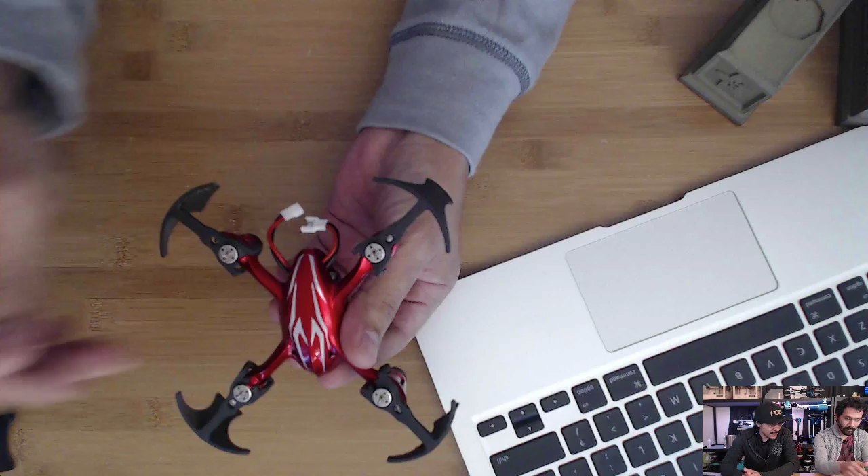We wanted to incorporate some landing gears, which it turns out we didn't really need. We wanted to launch this in our backyard. We have tall grass, so it turns out we can just toss these in the air. So I'm going to have to update that.

What we did figure out was we had a chance to try out the carbon fiber PLA filament from Protopasta. Right away I printed these out and wanted to see the weight difference between this and a regular PLA part. It turns out that we're saving 2 grams of weight with this. As you guys know who fly drones, what is the weight for? The weight definitely is a big factor. One gram takes about half a minute away from your battery time, so you're saving some minutes here.

You could definitely see the difference when you put these on a scale. You can see how much less these guys weigh. All 4 of these put together weigh 6 grams, and when you compare it to the carbon fiber, it only weighs 4 grams. It's awesome, so you're saving 2 grams there. When you update your design, you'll probably even save more on weight. That's really, really cool.

I really like the design of these props. I haven't seen something like this where it kind of looks like wings or something, like it's ready for battle. It's really cool, I like the design.

This is going to be a future project. You're going to make a nice learning guide and probably release the design file so you guys can modify it and take a look at it.

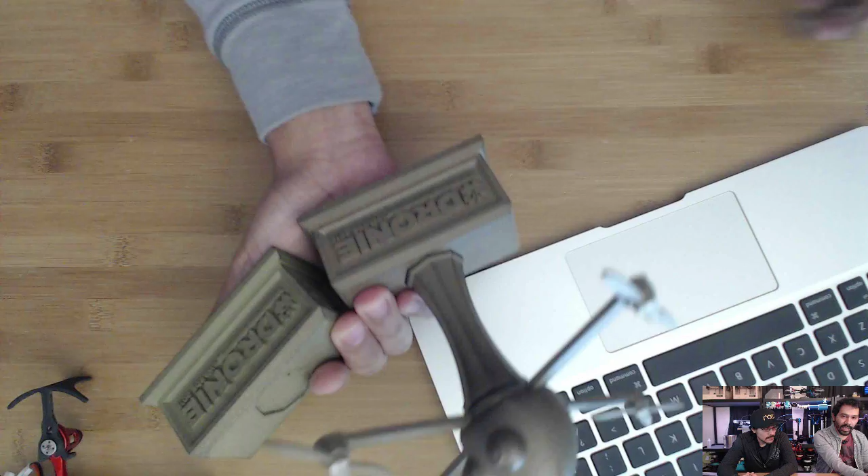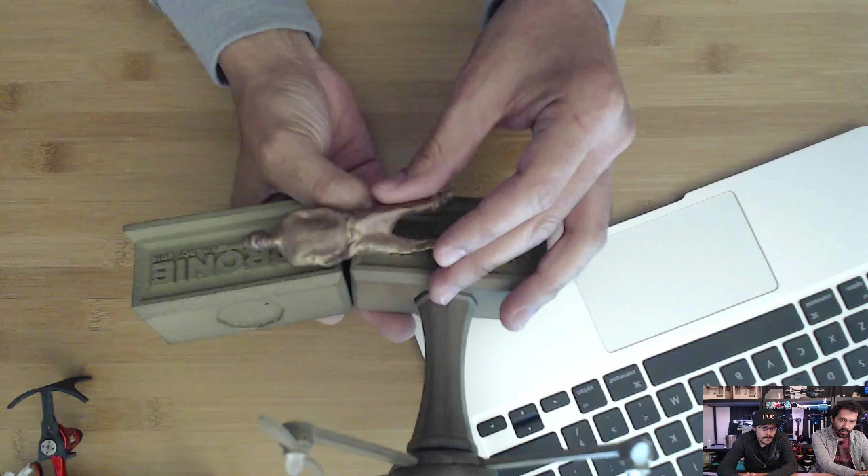You're able to bend it really easy. In terms of the shade of color, you get more of a greenish type tint compared to the bronze, which gives more of a darker, contrasting color. With copper, you get more of a yellowy type shiny look. I like the red in there too. You get like some sort of rose gold in there.

So the copper and bronze are definitely heavy, brass is way lighter than the other two. If you want it to look like metal, but maybe for a drone flyer or something, check out this stuff. If weight is an issue, there you go.

Just wanted to show how soft the brass material actually is. This is one of the prop guards that we were trying to remove from the bed. As you can see, it is pretty flexible there in terms of how soft the material is. So it's a little bit more fragile.

Definitely wouldn't be able to use these, I don't think, in a cosplay prop like the copper that we did for this week's syringe. Still experimenting on this guy, we'll let you guys know any updates on use cases. So far it seems to be good for things like statues, jewelry. Soft material, more of a greenish tint.

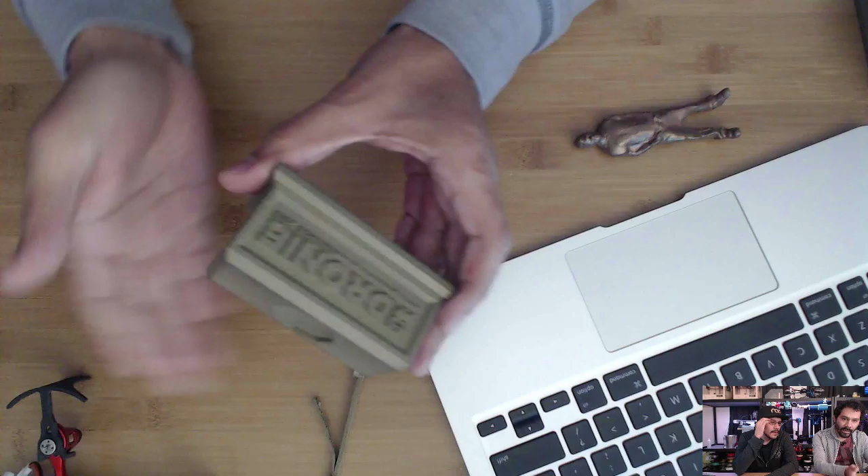Now let's talk about our rotary tumbler, maybe the medium, and also we did a polishing video not too long ago about using the rotary tumbler in different mediums. Do you want to tell us real quick what you recommend as a medium, what type of material?

We're using the same tumbler. The medium that we're using for the brass is, of course, brass screws. So brass on brass seems to work pretty well, and that worked really good with the copper as well, too. If you check back that video, that's what we used to get the polish for this copper.

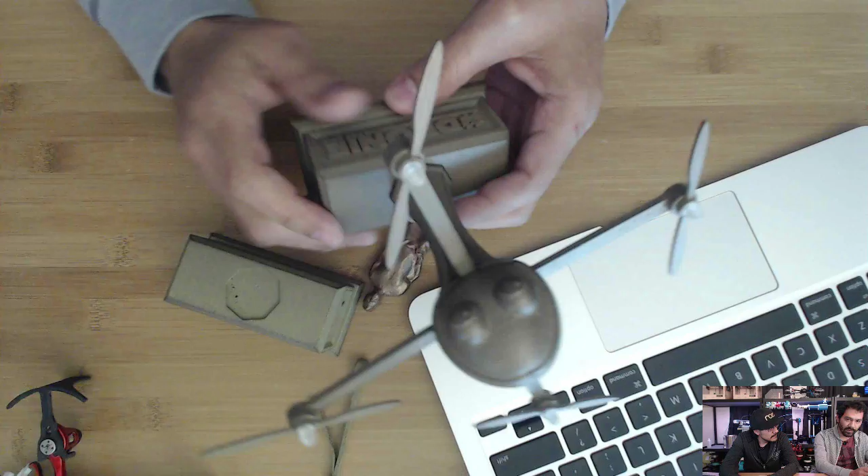For bronze, since we want it to have the darker feel, we're actually using stainless steel screws for this. That's what brings out more of the darker tones. We tried using brass on this, and it just made it look exactly like copper. So you definitely want to use the right steel medium to keep the finishing.

These all used the same polishing techniques, but all different mediums, and that's one thing you want to look out for when you're polishing this stuff. Each part is about 4 hours in the tumbler, which is actually a lot better than hand polishing it, as you'll see soon in the video.

Okay, more prototypes here. We're working on a very little tiny miniature. That's right, folks, this is a sneak peek. This is a new Pi TFT screen for the Raspberry Pi.

This is designed by Limor in K-Town. It's actually so new, it's still purple, still from Osh Park. And the real cool thing about this one, do you want to show that off, Pedro? I don't want to get in your space there. This one's a really cool one.

It has 5 buttons. It's a 2.4-inch TFT for the Pi. And what we're going to do with this project, we're going to make an update to our Game Girl project. This is going to be a pocket Game Girl using the Raspberry Pi Zero, plus, with the smaller screen.

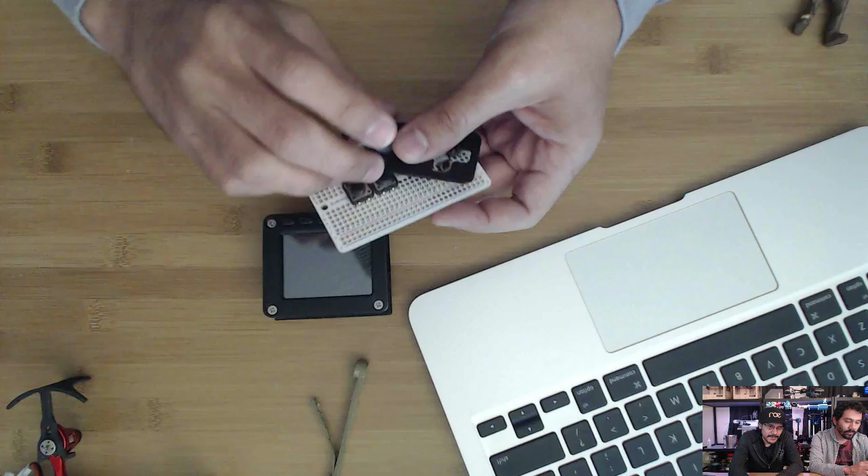Very, very cool project. Remember, we put together a Bluetooth gamepad not too long ago. So we're going to do sort of the same thing using a Permaproto, but of course we're going to have to saw it into a smaller piece there so we can fit everything in. But it'll be hand size, it'll fit in your hand.

Super cute, very adorable. Can't wait to finish this one. It's in the works now, folks.

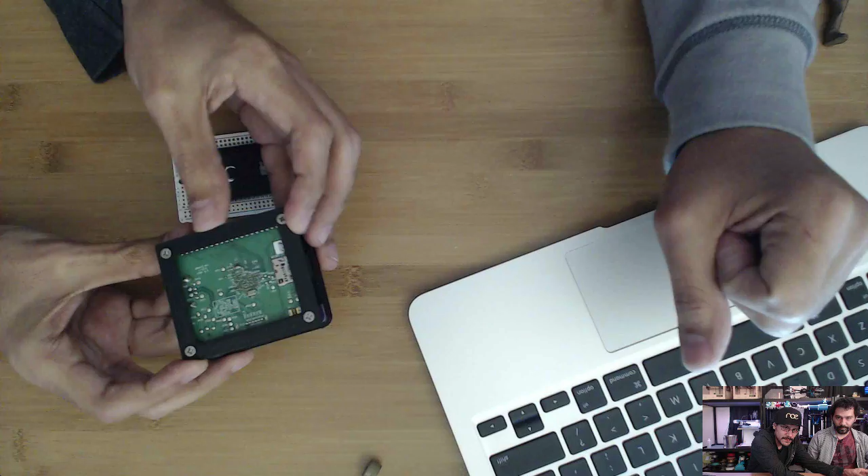So just wanted to show you guys the little mounting area here. This is just four standoffs that are mounted like that. And then we also have the little test bracket here. So if you saw the video last week on standoffs, same approach. We just kind of cut this out. I didn't need to print all that because I'm just testing this. Very cool little project.

Looking forward to it. Again, that's a new product that's coming out in the coming weeks. It's a 2.4-inch Pi TFT. So that is it, that's the prototype stuff.

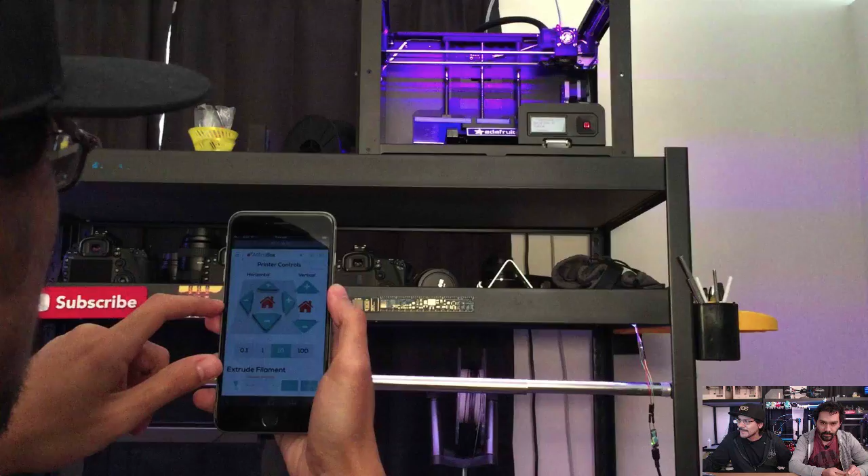Daniel, the CTO from AstroPrint, emailed me and said they've got a beta they want us to check out for the MakerBots and Sailfish. So now AstroPrint's going to work natively with machines that use Sailfish firmware and native MakerBot Replicators. This is a big deal for us, especially since we still use our Replicator 2 quite heavily. It's a workhorse machine, works really well, very reliable, and now we can control it with our phone.

When the MakerBot 5th gens came out, we were a little jealous because you can access it through your phone, get it on the Wi-Fi, get a camera, do all that. Now you can do it with DIY. You can get yourself a Raspberry Pi, plug it in, and you're up and running on your Wi-Fi network.

So here I am heating it up, testing it out, kicking off a print. It's able to generate X3G files, and then we can wirelessly send these over to the printer without having to tether. We're using a Mac Mini right next to the Replicator because our SD card broke. That's right, so it's another reason to upgrade to an AstroBox or an OctoPrint.

Very, very cool, I love it. Definitely a worthwhile upgrade for this. Yeah, it's coming soon, guys. It's still in beta, there's very little bugs, almost no bugs. So that's really, really cool. We'll keep testing it and let you guys know when it's ready.

Next up, you just saw it, Mr. James Bruton peeping in, saying what's up. This is a very cool project. Every week James has got a new update to his massive project. This week, HulkBuster, this is really cool. As more content comes out from the Avengers trailer and movie, James is revising his thing bit by bit.

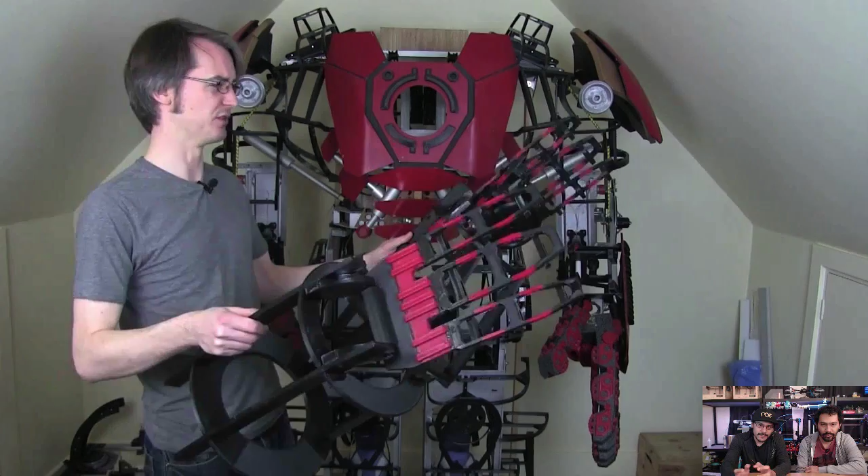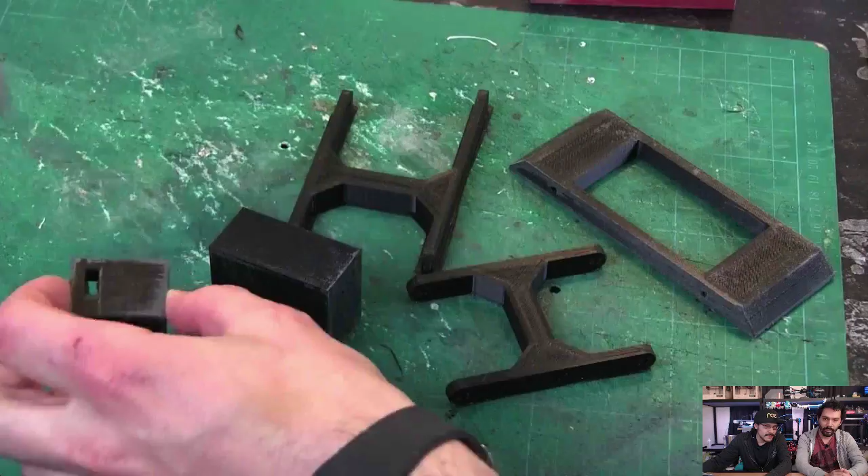This time, massive arms. This thing is a multi-part print using NinjaFlex for the flexible joints in the fingers, and then rigid ABS material that's acetoned, chemically bonded together to make these massive parts. Very, very cool. In this update, he goes through his CAD, walks us through some of the mechanisms for the arm, prints it out, and now he's starting to look at a bunch of options for mounting.

Servos, electronics. This is really cool. Here it is with the arms all built in there. Very, very nice looking. He's even using nylon filament as the string cords to make the hand open and close. Very, very cool approach there.

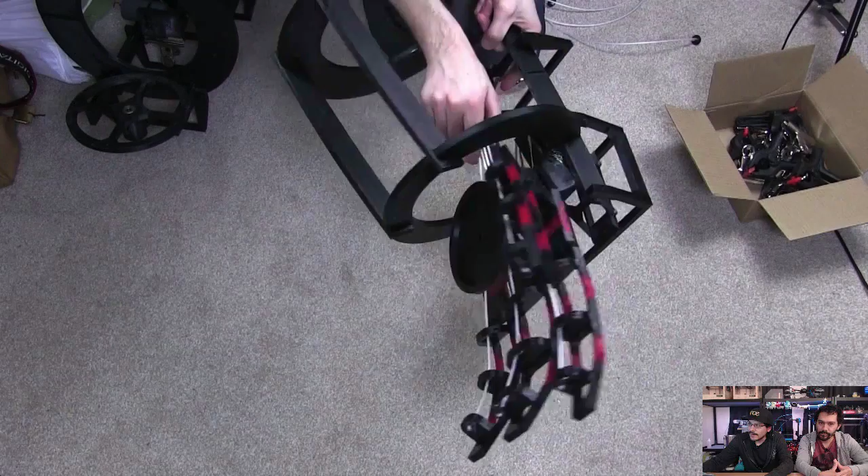Here he is testing that mechanism out. So when you tug on those wires, you can open up your hand like that for shooting out some laser beams, and then you can close the fist like that so you can shoot out some rockets. Very, very cool.

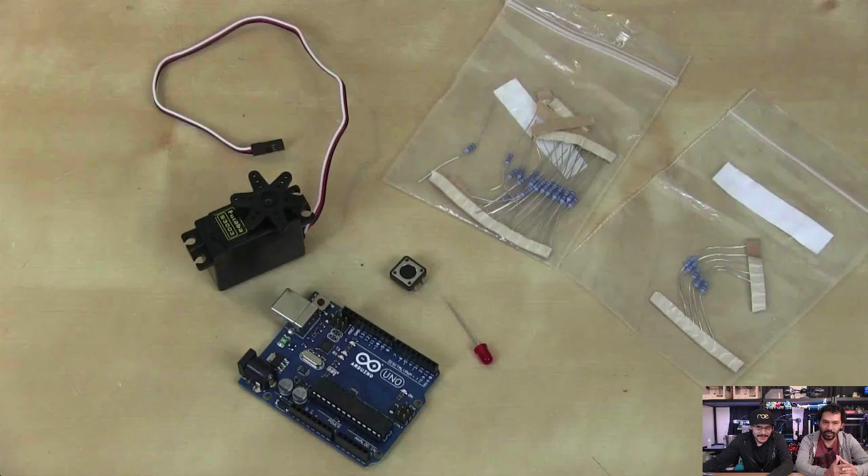Yeah, there's a lot of components that he's working on for this. And what's really cool is now he's jumping into Arduino and showing off how he's going to be coding a lot of the logic for the servos and the LEDs coming out.

So here he is drawing some schematics of how everything works. Really love his explanation of how he's actually coding this as well. He jumps into Arduino IDE and he's looking at some of the definition declarations that he's added to his file. He's going to be releasing these for free, and you can check out a very nice explanation of how everything's being triggered, how everything works.

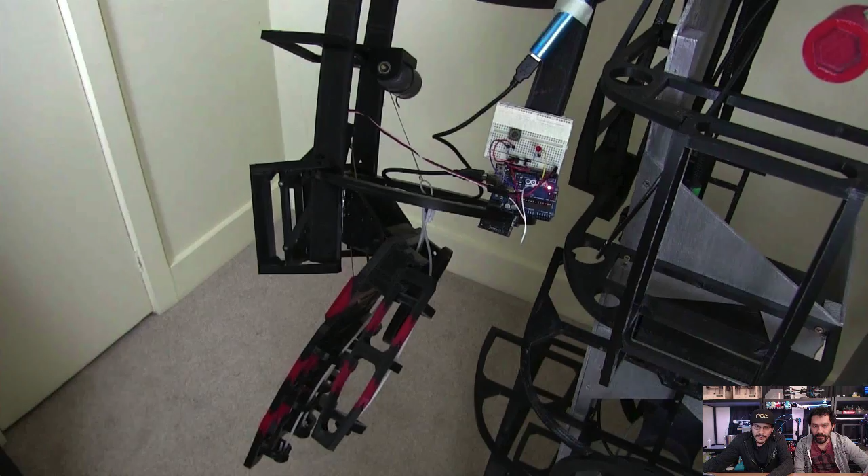And then on the finale, he gets a nice little prototype mocked up here. So basically, hit a switch, it activates a servo, and then fires off his LED. This is a really cool circuit because you can use this for all sorts of different projects. So you'll be seeing more of this from James in the coming weeks.

Very, very cool, gotta watch out for it, and hopefully next week we'll see some more stuff on the Unibeam, that part that you put together. A couple months ago we collaborated and put together a Unibeam for the center chest, which is a very, very cool project in collaboration with Phil B.

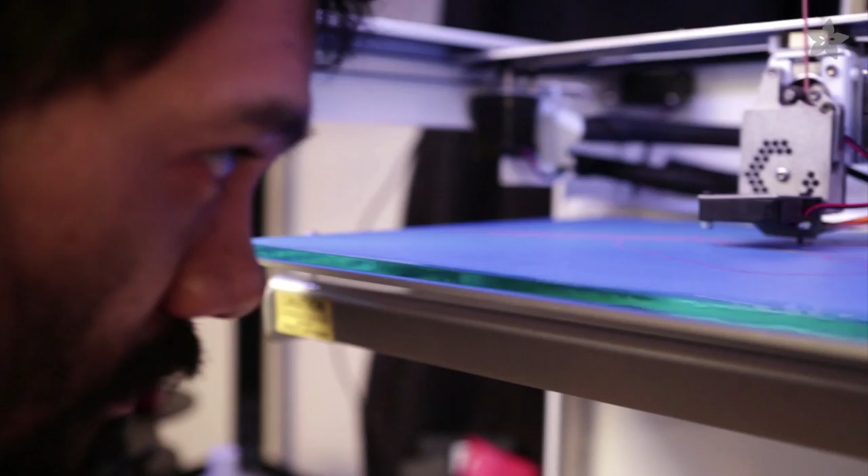To 3D print the parts, we're using the Type A Machines Series 1. We're using copper filament to give the parts more weight, and it's also going to give it a really nice grungy steampunk look when we polish these parts. You can check out the review on copper fill in this video here for more information on polishing techniques. Each part takes about 2.5 hours to print.

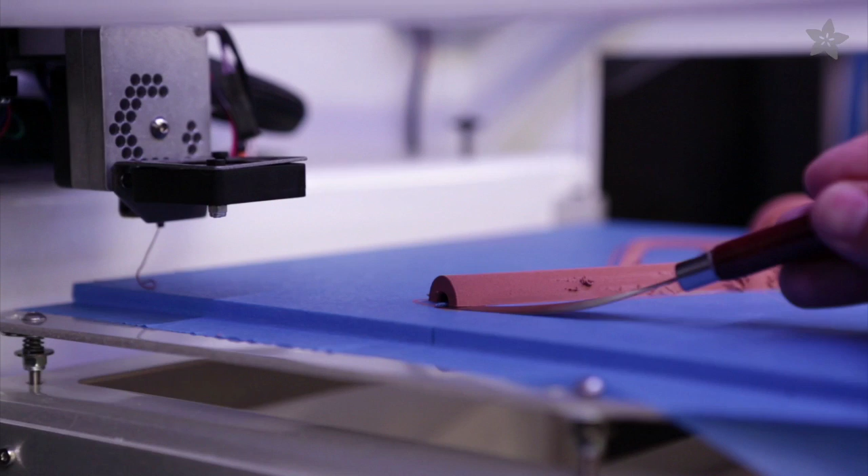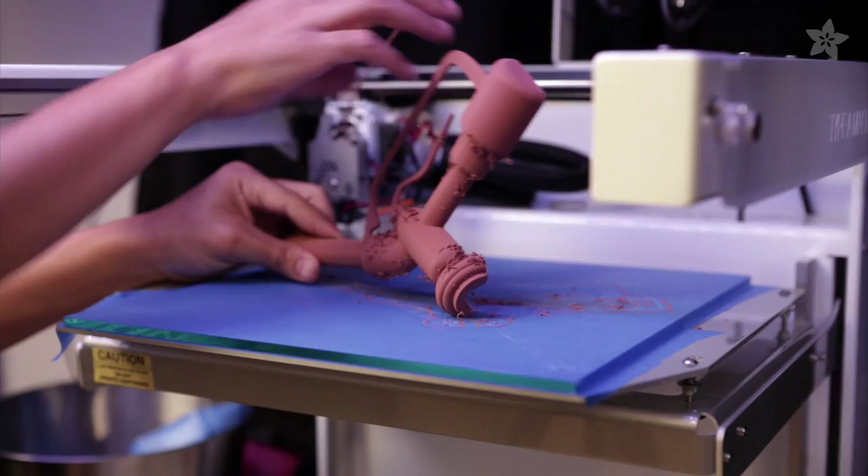We found that the best way to remove copper filled parts without damaging the blue tape is to use a palette knife and a spatula. Most parts printed in copper fill are going to need some cleanup, so we trim off the stringy bits using our fingers, then move on to the Hakko snips and the palette knife.

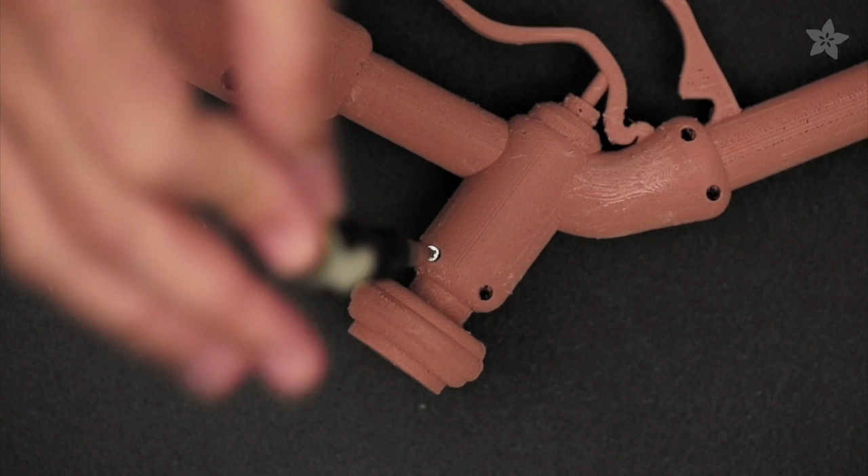The standoffs are printed with a tight tolerance, so we need to tap the screws using a couple of tweezers. We designed the standoffs to fit number 2-56 screws, so you'll want to fasten the screws into the standoffs to create the threading.

Now let's take a look at some of the polishing techniques. We tried out the Dremel polishing kit and found these 3 bits work the best: the white detail abrasive brush, the 280, and the 320 grit abrasive buff.

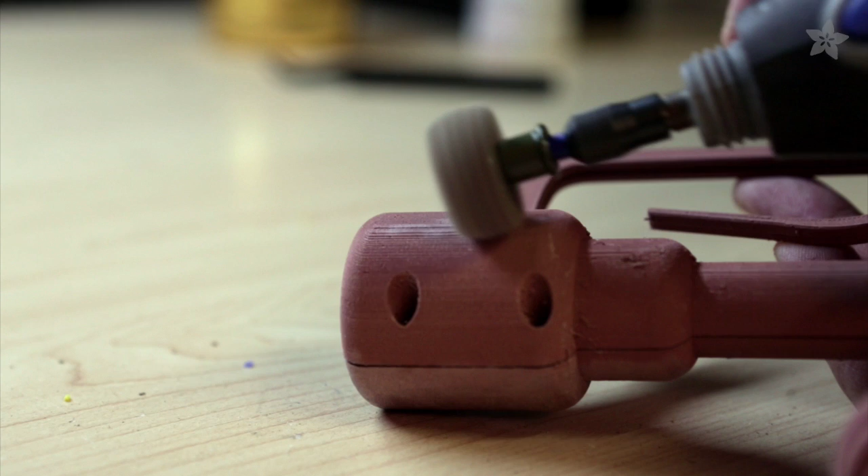Polishing takes a lot of time, so you're going to need at least an hour for each side to get that shiny finish. You'll want to focus on one section at a time, try to blend the layers together, and go back over sections to even out the surface.

You can then switch to the white abrasive brush for contours and hard to reach areas. Use the slowest speed to polish the surface without damaging the base layer.

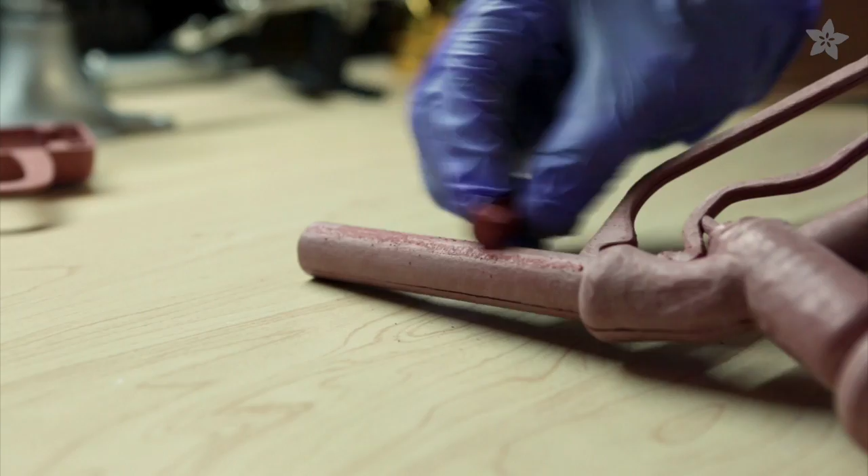Next up, we'll apply some polishing compound to the surface using gloves, and rub it into the holes to fill in the surface. The 320 grit abrasive buff helps smooth out the finish and adds contrasting tones to the overall look of the parts. Comparing the surfaces of these parts, you can really see how well the polished part came out.

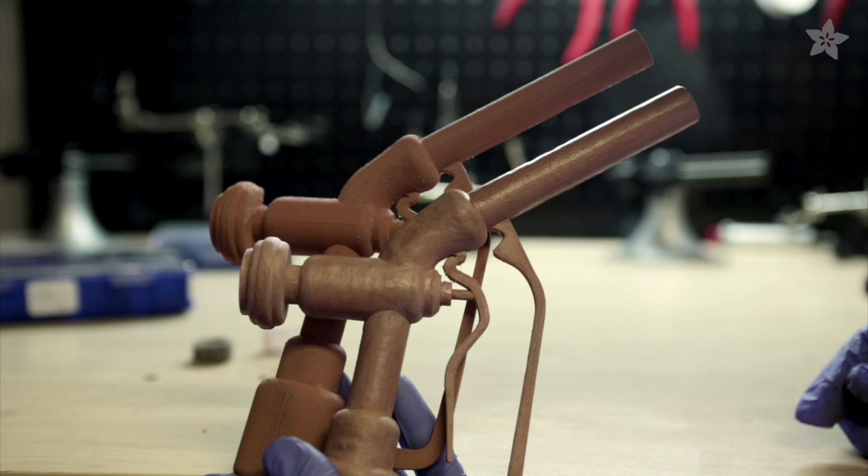It's definitely worth the time finishing your copper-filled prints, and it's a great alternative to the rotary tumbler.

To make the circuit, we'll start off by measuring 3 wires. We're going to be using 30 gauge silicone-coated stranded wires for this. We're also going to use copper foil tape to connect the rechargeable coin cell battery. We'll cut 2 pieces and add a blob of solder so we can connect to the silicone-coated wires.

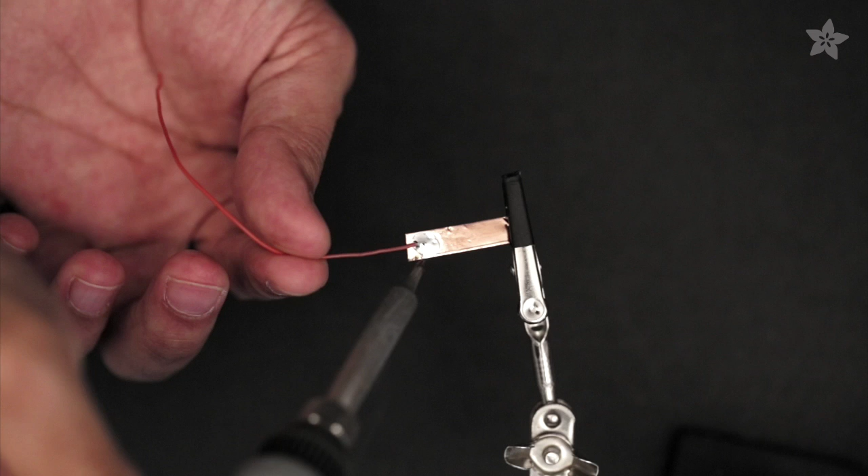The 10mm LED is connected to a 6mm tactile button. We're going to need to tin and connect it to the rest of the circuit. You can read the full guide on the Adafruit Learning System.

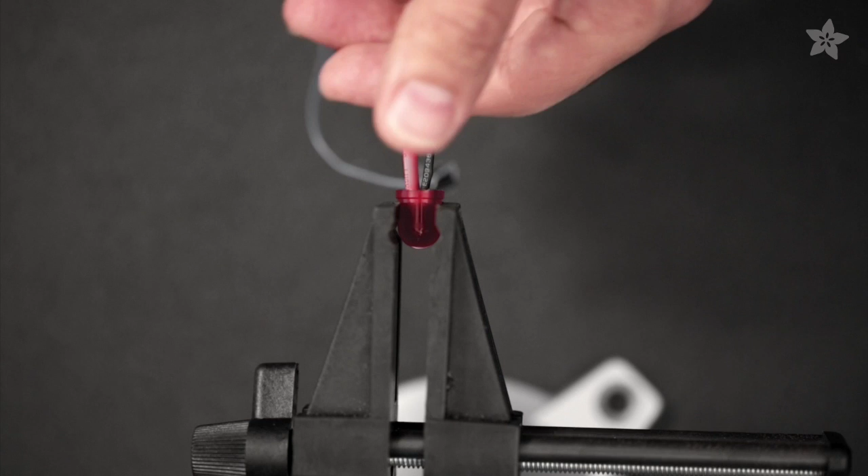Next up, we'll solder the positive and negative connections on the LED and seal it with heat shrink tubing. The copper tape has an adhesive back, so we need to peel back a small portion of it to stick it to the positive and negative sides of the coin cell battery. Leave some of the backing on so the copper tape doesn't touch the side of the battery.

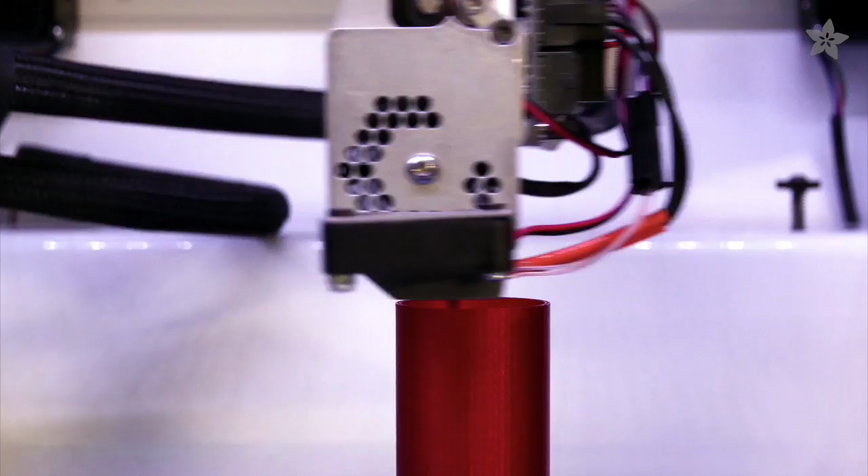The bottle was printed in translucent red PLA, which diffuses the LED really nicely. It was also printed without any supports at 200 microns.

We found if you orient the needle on the bed diagonally, we can print it as large as possible, which turns out to be 434mm long. We printed it in 2 halves and just glued them together using E6000.

Before securing it shut, we'll check to make sure the tactile buttons are mounted in place and test the alignment of the actuator to see if it lights up. The rubber Ninja Flex topper grips nicely onto the bottle and diffuses the LED when printed in transparent Ninja Flex.

And there you have it, little sister Syringe. Definitely one of the coolest 3D printed props that uses multiple materials and of course some simple electronics. Polishing techniques will definitely come in handy in future copper-filled projects.

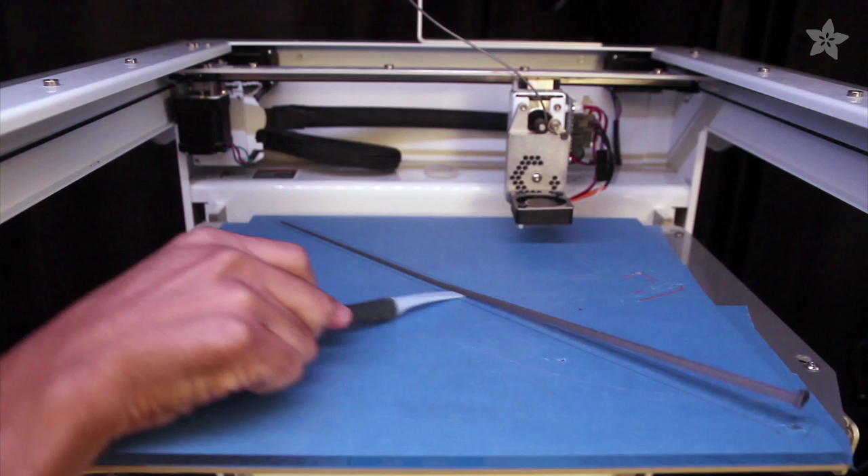So let's take a look at what we learned. Recessed standoffs increase in tolerance with Z depth. Diagonally orienting thin parts will increase the bed volume by 100mm. We also learned about Dremel polishing tips and polishing compounds.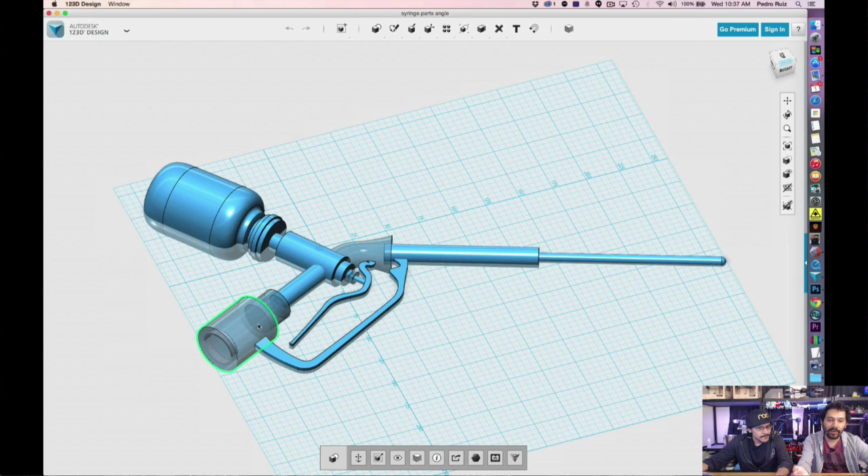So after that, we went ahead and grabbed some of our widgets that we've worked on before, specifically the rechargeable coin cell battery, which you can find on our 123D gallery page. And all this is just the little cylinder there that's completely fitted, so we can just snap on and have a nice tolerance of holding the coin cell.

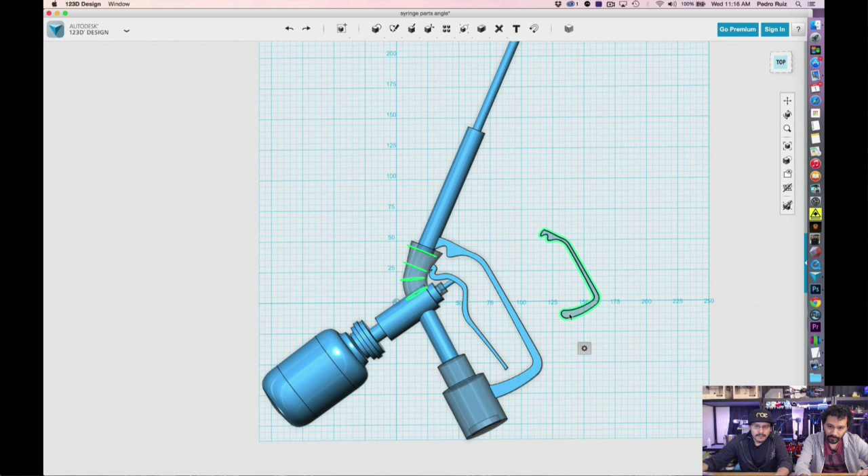We also grabbed the tactile button that we used as the momentary push button in there. And for the handle, I actually imported the vector file because I wanted to be able to apply fillets and smooth it out and change the trigger guard according to my hand.

So the quick tip here is that you don't want to scale your SVGs because the SVG parser that's inside of 123D can get a little wonky. So you want to extrude your SVG file and then scale up the model that you extrude out of that, and you should be able to scale it with no problems there.

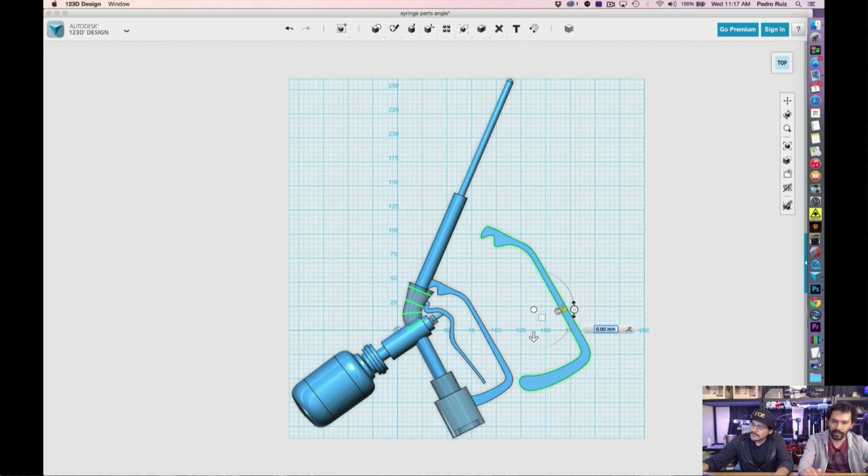After that, I was able to go in there and start to shell out both bodies. And here you can just take a look at some of the way that I created the standoffs. For more on that, you can check out last week's video that explains how Noe creates a lot of his standoffs.

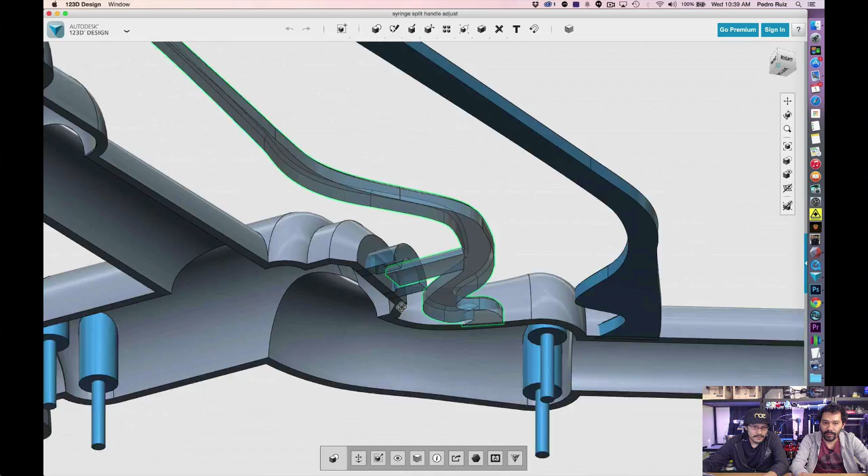So the tip here is not to merge anything that doesn't need to be hollowed out first. 123D can freak out a little bit if it tries to hollow out areas that are too small, so the trigger and the trigger guard don't need to be hollowed out. So what you want to do is keep those separate until you hollow out all of the geometry that you're going to need to before you merge all those together.

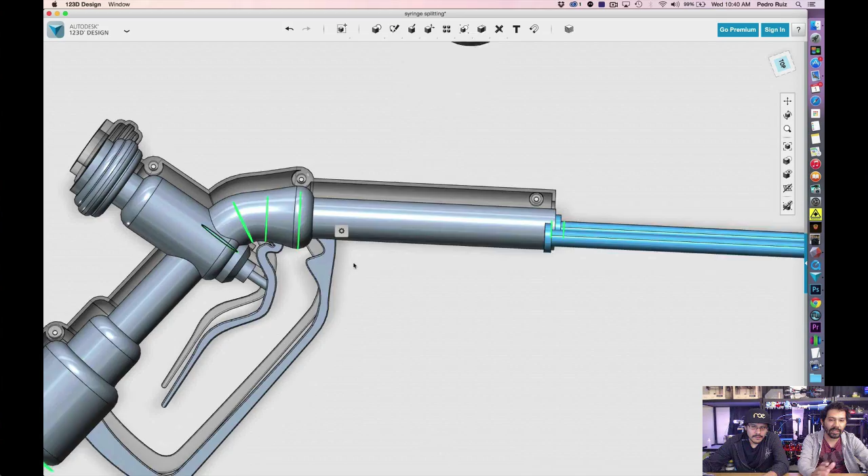Okay, next, we just forgot to mention the way that we created the sort of curved geometry there. It's just a bunch of ellipses that we select and then loft all together.

Okay, so the second tip that we ran into was in the standoff, the radius for it. It actually increases as the curvature of the cylinder goes up, so you definitely want to look out for that. I think it's like a 0.4 to 0.8 difference that you want to increase to make the screws fit inside of the standoffs.

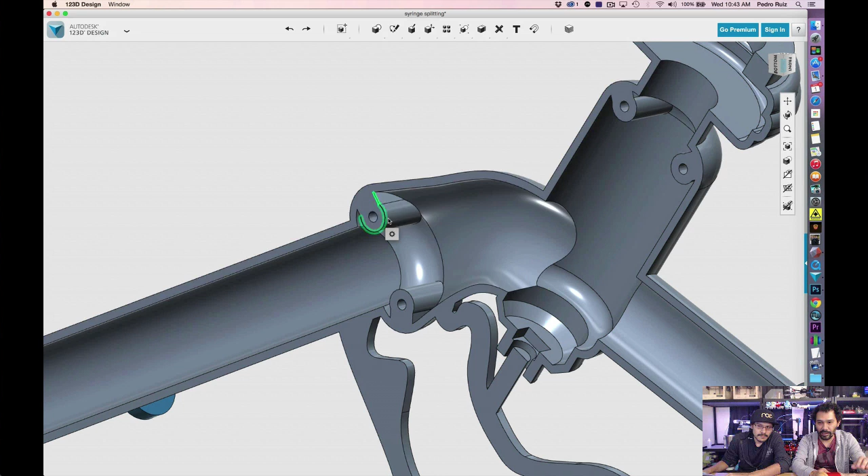Okay, the next tip for standoffs is because of the cylinder, they have to be a little bit further away from the wall.

If you were to print those out, the cylinders for the standoffs would just pop right off. So you want to add a little bit of strength by adding geometry that connects the standoff to the rest of the body and to the wall of the shelled-out cavity. That's another thing you want to do with standoffs that are inside of cylinders.

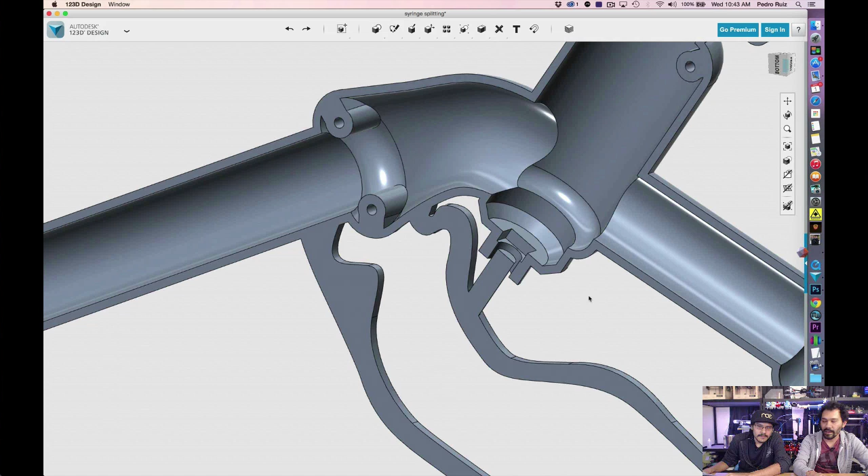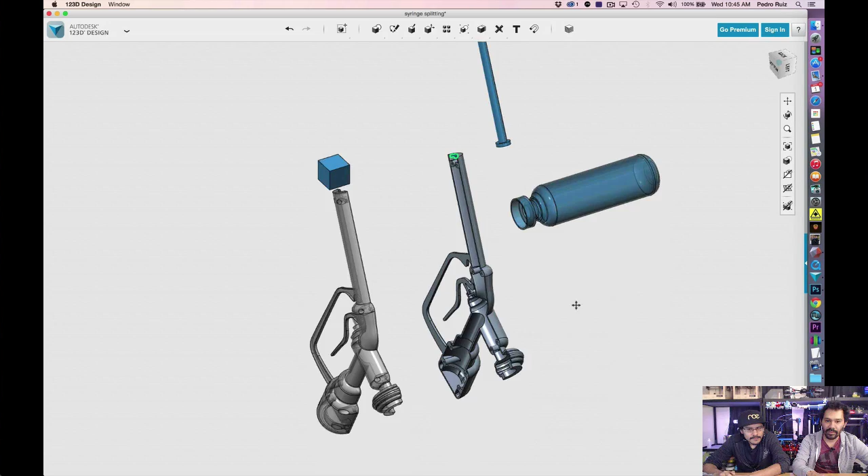Another thing you want to do if you're not printing in copper fill, you can print this in regular PLA and do a paint job on that, is update the tolerances that hold the bottle together. Go into the walls and push that in a little bit by like 2 or 4. You're also going to want to do this to the wall that holds the needle in place. So you can definitely use regular PLA if you don't want to use the copper fill. It'll make it a lot less weight, so you can definitely do that.

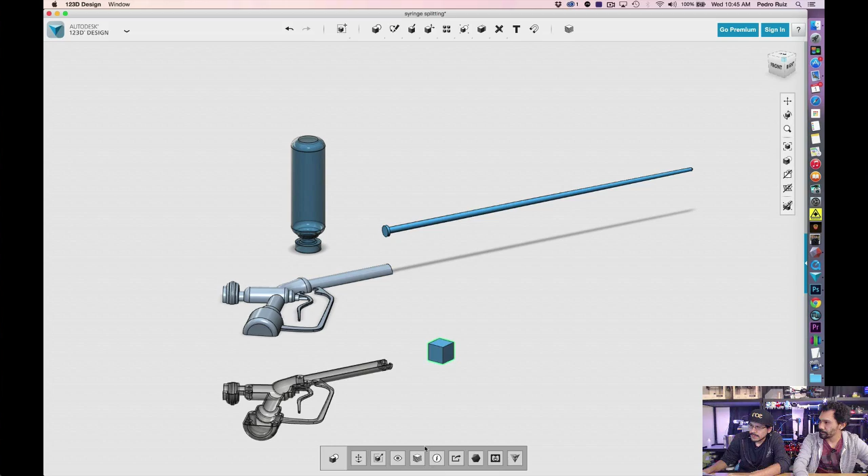Very, very cool. I love this project. Definitely a great use of Ninja Flex, transparent stuff, metal filament, and of course the Type A machine really helped out here because you can print very massive prints. But if you wanted to, you can take Pedro's file and chop it up even more and print it out in several pieces.

You can make this needle a little bit smaller if you need. All of the curves are there, so all you got to do is just move this down a little bit and then loft between it to make it smaller. You can definitely update that.

We didn't get a chance to talk about the Ninja Flex we're using on the nipple here. We just did the change filament command, so we printed 2 of these in one print. We're using the Caramel Ninja Flex color, which closely resembles the copper. It's pretty close. We tried so many, we tried like every color, and this was the closest we could get. We even tried gold, but gold didn't seem to match too well - it's got a little bit of a green tint to it. But yep, definitely pick this up. You can paint it if you wanted to as well.